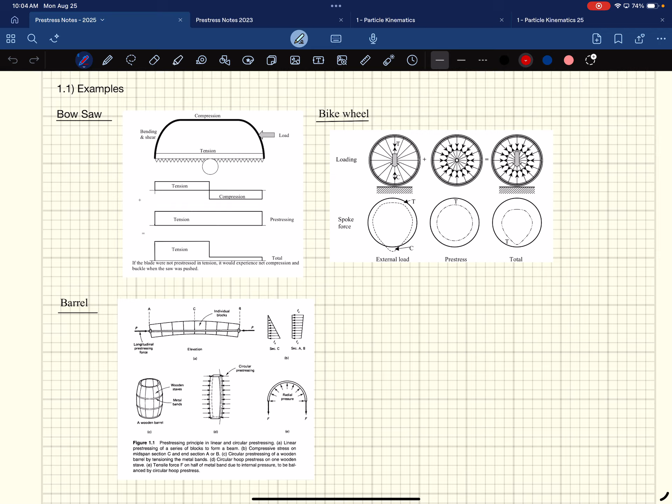Okay. So we talked briefly last time about the history of it, and then this idea of the difference between pre-tensioning and post-tensioning, right? With pre-tensioning, you stretch the steel first, you cast concrete around it, then you cut it afterwards and transfer the load in. Post-tensioning, you cast your concrete with a duct in it, and then you have cables that have plastic sheathing so it doesn't bond to the concrete, and then you pull it afterwards, and then you transfer the load, and you have these anchor points, right? And we briefly talked about that.

Okay, and then we actually talked a little bit about a couple of pages from now. We talked about the steel properties and things like that. So let's dive into advantages and disadvantages. Somewhere here, I got my notes.

Oh, it's hot in here. Oh my God, it's so hot, but I can't open that door or that window. Class outside. Yeah.

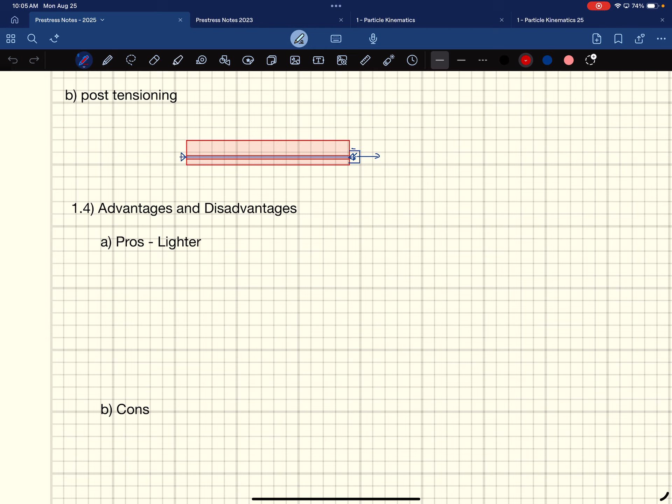All right, pros. All right, it's lighter. Obviously, I got one written in there already. Lighter, right? You get thinner elements, right? Lighter and thinner. You can get away with that. Improved deflections. Right, that pre-stressing helps us with our deflections. We'll talk about that later on in the semester. And obviously, I mentioned this last time.

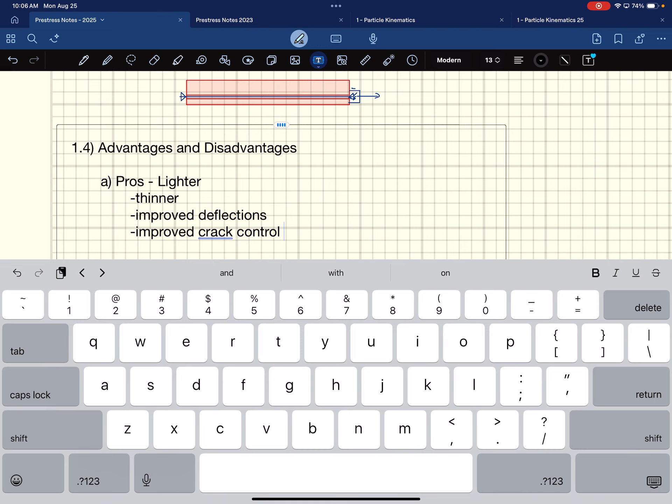One of the main things is improved crack control. Right, which is usually just like an aesthetics thing, right? Looks better. But there are some practical reasons. And nobody wants to go to a building with a bunch of cracks, right? Oh, sorry, it looks better, right? Without cracks. Just mention that, right? One of the reasons, right? It makes you feel uncomfortable.

Hate typing with this. Fuck. Motherfucker. Uncomfortable. There we go.

Right? You ever been in a building where you see a bunch of cracks and stuff? The basement of this one? Yeah, the basement of this. Makes me feel uncomfortable. It could be structurally fine, but still just no thank you, right? Freeze, right?

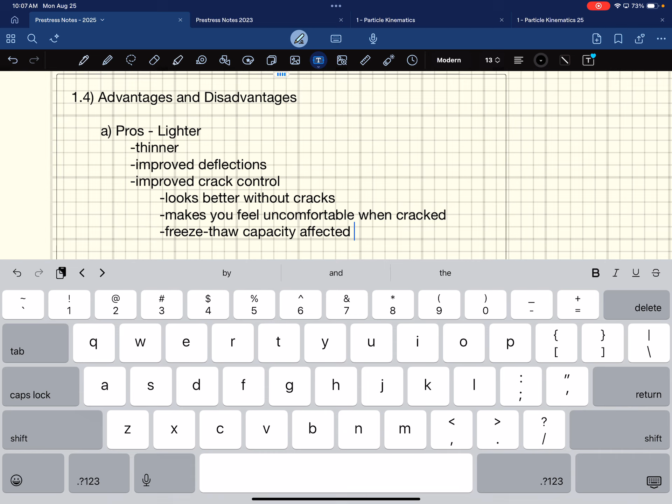If there's avenues for water to get in, the freeze-thaw resistance can go down. Water gets in and expands, it contracts and stuff like that. Corrosion can get in there. That is an issue.

Okay. Another pro here beyond improved crack control: we do get improved shear capacity. Right. Loss of shear capacity is associated with tension, right? You get those tension cracks at 45 degrees. Well, if you pre-compress everything, it helps with that.

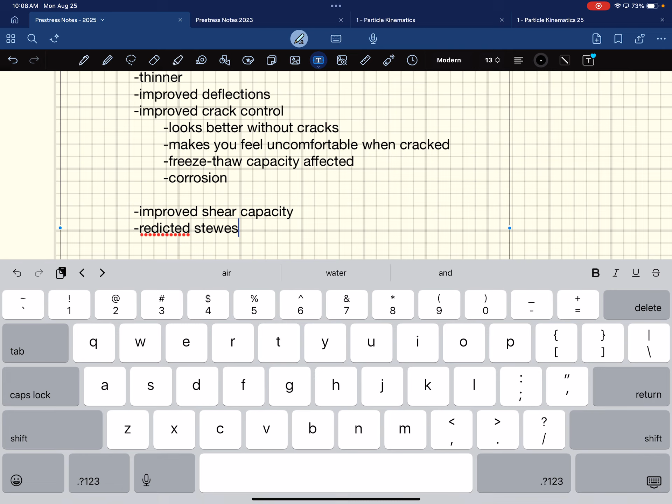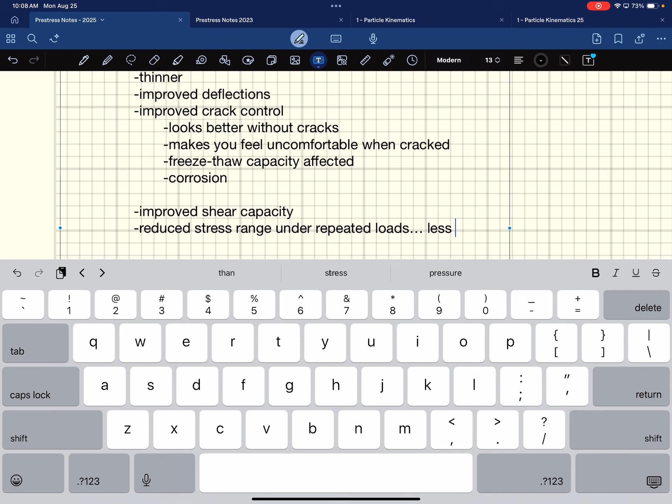Ooh, that's an important one here. Reduced stress range under repeated loads. Okay, where this is an issue is in fatigue. Right? You have less fatigue issues with pre-stressing.

It's the range in which you stress something that is affected by fatigue. If you're going from 0 to the max, it'll have less cycles that you can go through before it fatigues. But if you're just going through a smaller range, you can do more cycles before it fails. All right, those are all my pros that I have.

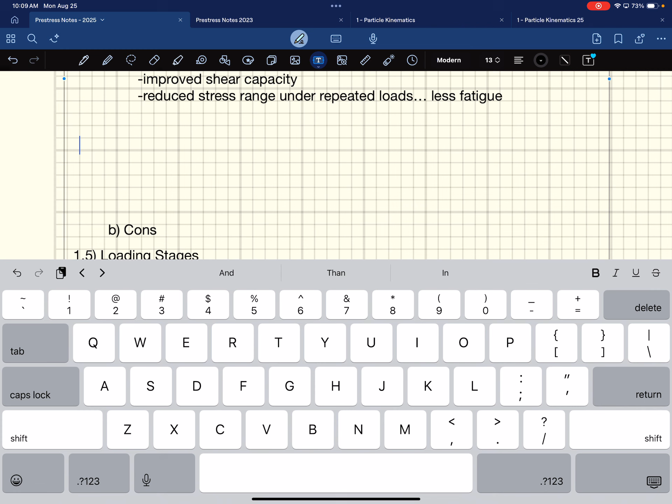Cons, it got moved way down here. Where are my cons? How many cons though? Oh, I see what I did. It's because it kept just going down.

Right. Major con is cost. More upfront costs. Maybe in the lifespan it's not, right? Because you have less maintenance costs, but at least initially upfront, it's going to cost you more to do that.

The other problem, this actually is a big deal around Montana, is contractor and design experience. We don't have a lot of contractors in Montana that can do post-tension floor construction. Right? It's a very specialty thing, and so a lot of times a contractor has to bring in somebody else from the outside, and even the design side of things is kind of new to our people too. Our people are us, Montana.

I mean, it is, right? It is like in your job office. This is a new thing, and some of your senior personnel may have never done a post-tension floor design on anything, and so where are you going to learn that from, right? And so that is a big deal. You might be able to bring something to the table being able to do this when we're done.

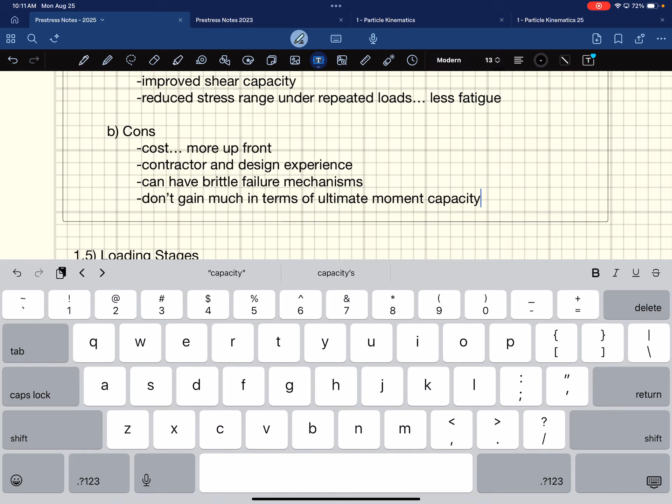And then the other problem is you don't gain much in terms of ultimate moment capacity. Uh-oh. You'd think you would, right? Because you're pre-compressing everything, but you don't. You actually, what is going on? Yeah, you actually don't have much, and we'll get into that way later in the semester.

We'll calculate the moment capacity, but the moment capacity of a pre-tensioned member and a non-pre-tensioned member are very similar to each other, right? And so you don't get much in terms of your ultimate load carrying capacity. Again, this is just a serviceability thing for the most part.

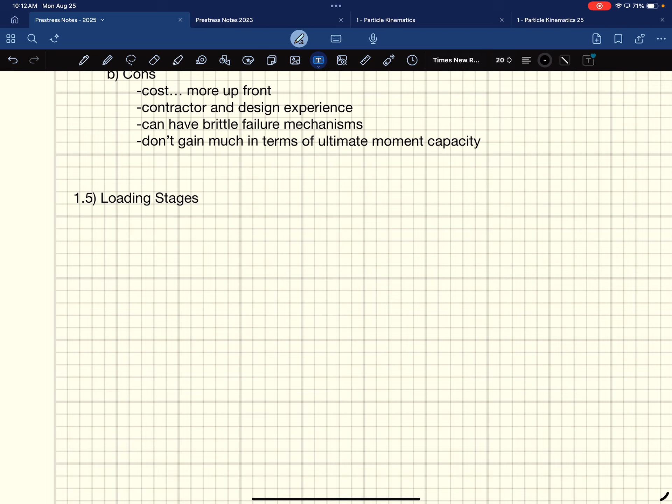Okay, all right, loading stages. We briefly discussed last time what the equation was, right? It's just F over A plus My over I, right? That's all the equation is. The actual mechanics are super simple, and we should get to those by the end of today. But what it gets complicated with is all these different loading stages.

Okay, I used to talk a lot about it. I'm not gonna do that. I'm gonna say simple calcs are complicated by loading stages and varying material strength.

What up, Neil? Coming right from a workout into a nice hot room to sit in. Just a shower for you guys. Oh, you did? Hey, thanks. Very hot in here.

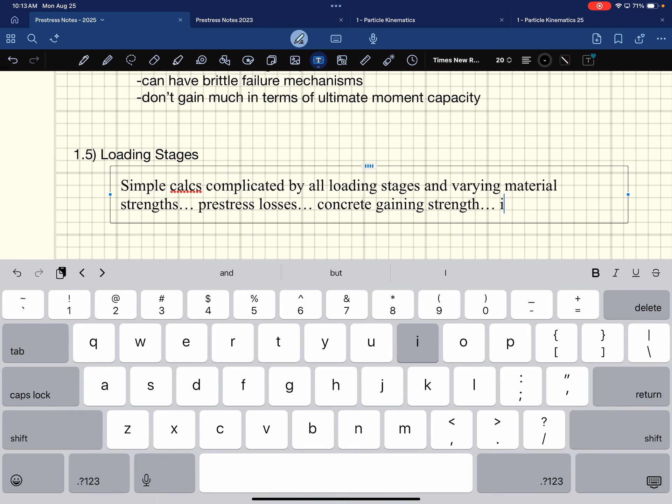Right, varying material strengths, right? We have pre-stress losses. Concrete gaining strength. Initial loading. Service loading. Ultimate loads. Right. Just my thoughts on it, okay?

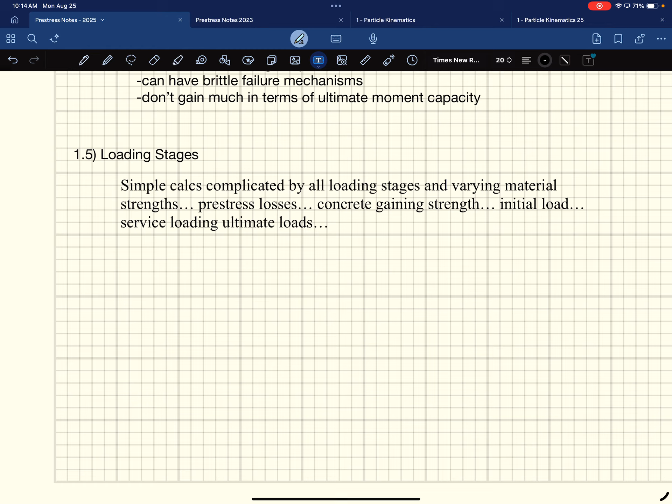We're gonna define these in more detail later on, right? Exactly what loading stages we're talking about and what material strengths you use and stuff like that. But just to set the stage, the simple calcs are complicated by all the loading stages and varying material strengths. We have pre-stress losses, concrete gaining strength, initial loads, service loading and ultimate loads. Right? Everything's just changing.

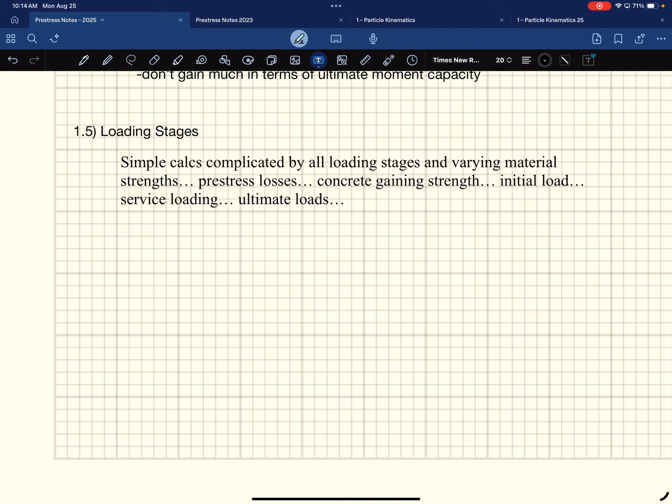Okay, so now we'll do, everybody get that? Get that? Kyle, get going, go. You got it? Got it?

Got it? Everybody get it? You get it? You get it? All right. All right, let's go down to the materials.

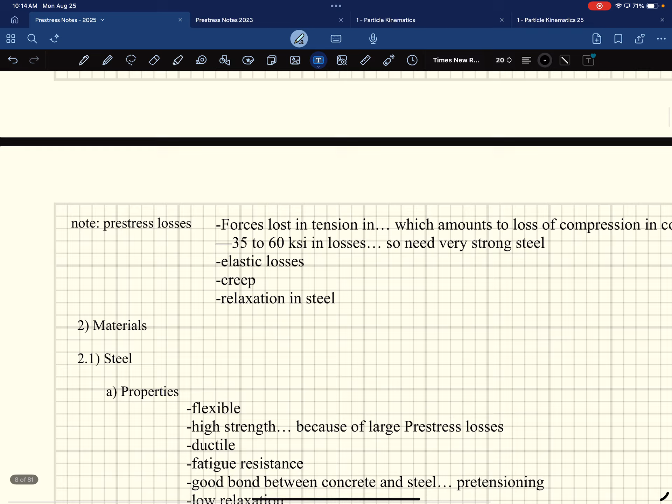Right, you've got to define a few things before we dive into the actual calculations. We kind of set the stage for it, right? So again, we talked about the forces and the tension, which amount to loss of compression in the concrete, 35 to 60 KSI. So we lose a lot of stress due to pre-stress losses, right? And they come from elastic losses. We've got creep that can happen. We have relaxation in the steel, and because of those things, we lose some of our pre-stressing, right?

Regular steel, right, goes up to 50. We talked about the 50, 60 KSI. 36 is your basic, right? We can't be losing that much, right? It wouldn't help us at all, right? Why do that? So then our steel, right?

We want very flexible steel, so a change in length causes less of a change in strength, right, or stress, right? And so we want flexible steel, we want high strength, we want it ductile, we want it fatigue resistant, we want good bond between the concrete and steel, especially in terms of pre-tensioning, right? Post-tensioning, we don't want that bond, but pre-tensioning, we do want that bond, and we want low relaxation, okay?

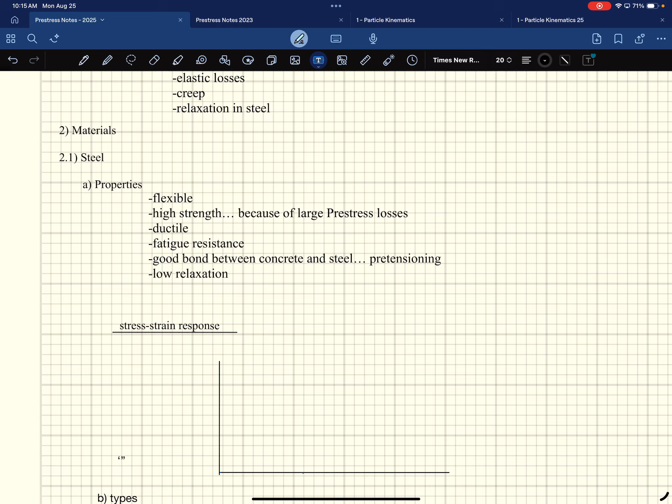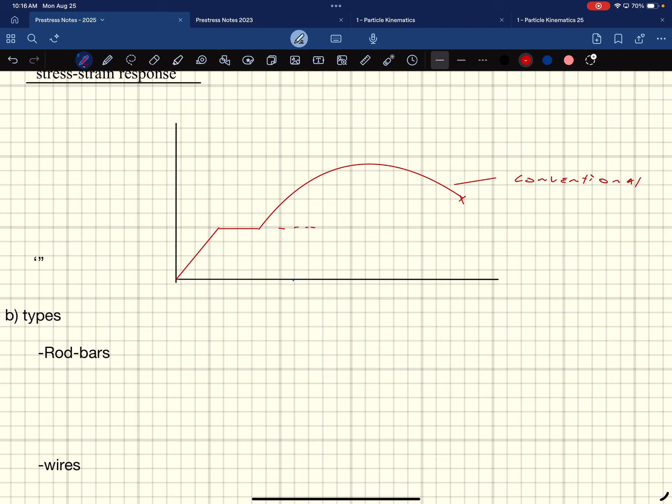So what the actual stress-strain response is, it's worth visiting a little bit on the material side of things. Regular steel will do this, right? It'll go up, hit a nice yield plateau, go across for a little bit, and then it goes through strain hardening, right? And then it breaks over here someplace, right? That's conventional steel. Right? And then this, right? 36 to 60 KSI, somewhere in there. That's where you hit that initial yield plateau.

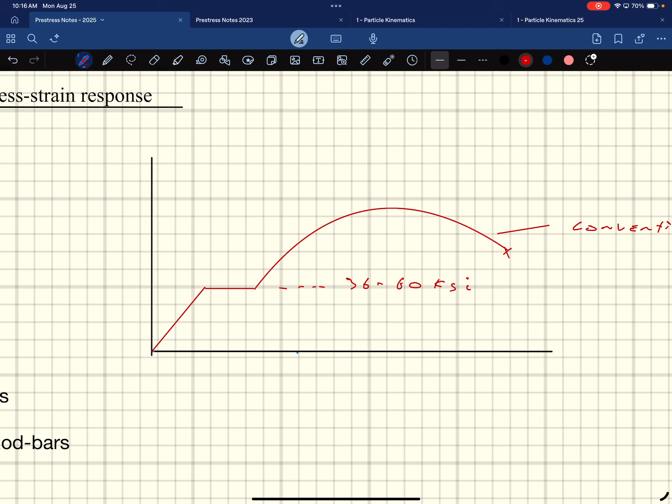When you talk about the yield strength of steel, that's what we're talking about. This initial yielding, right? But really there is a strain hardening that happens afterwards that goes up to about 1.5 times what yield is. But we pretend that doesn't exist in regular design, right? We don't actually take it into consideration; it's kind of built into the conservatism in design.

All right, but what pre-stressing tendons look like when you pull them is they are a little bit more flexible, just a little bit. So they're going to be a little bit less like that. And then they just kind of go up like this, and then they break up here someplace. Actually, that's not to scale. Should I make it even more? It's really high, right? We're looking at around 250 to 270 KSI up here.

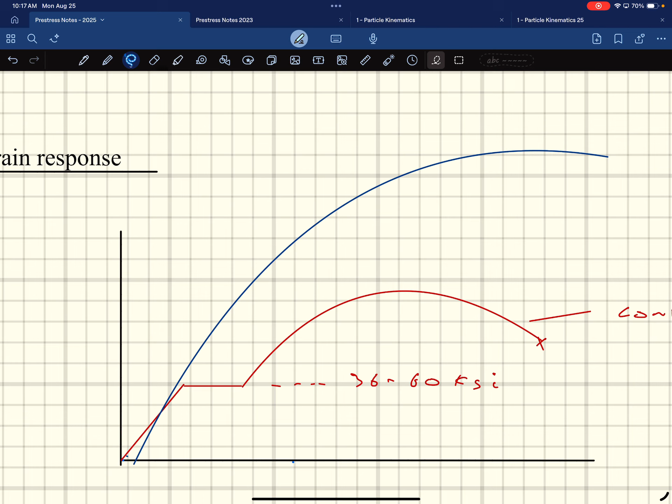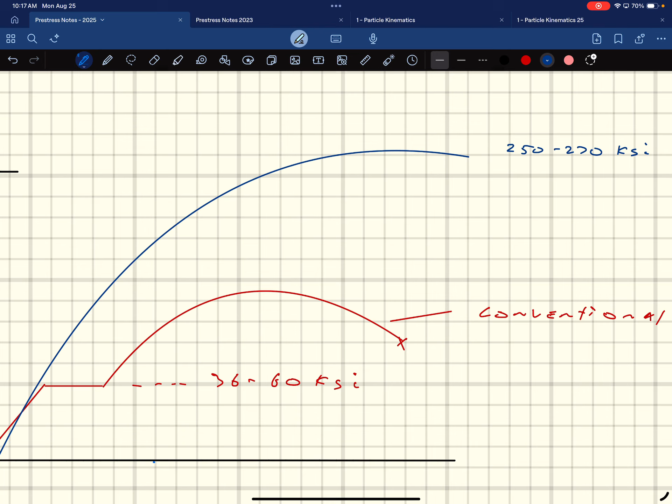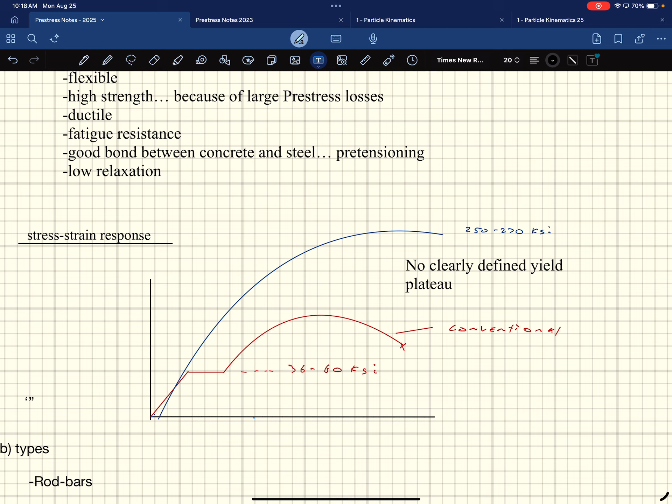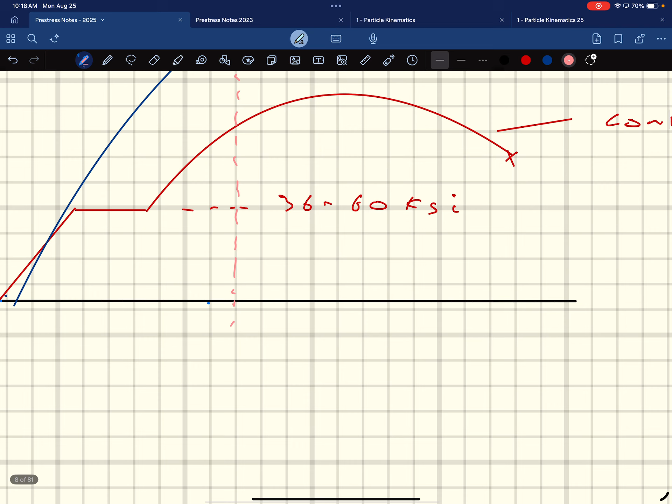But there is no clearly defined yield plateau. It goes all the way up to there. Okay. That being said, they still define a kind of yielding. They do put a spot in here where they call it FPY, even though it's not real. We'll call that FPY, right? And it's at a 1% offset. You look at a 1% strain and they go over and they call that the yield stress. It's not real though. It doesn't have a real plateau.

You may remember doing this in mechanics of materials where you did a 1% offset: you see the slope at the beginning and then you go off 1% and you see where it crosses. Do you remember doing this at all? In the materials class.

You remember it, Neil? Yeah. Okay. Yeah, something like that. Are you lying?

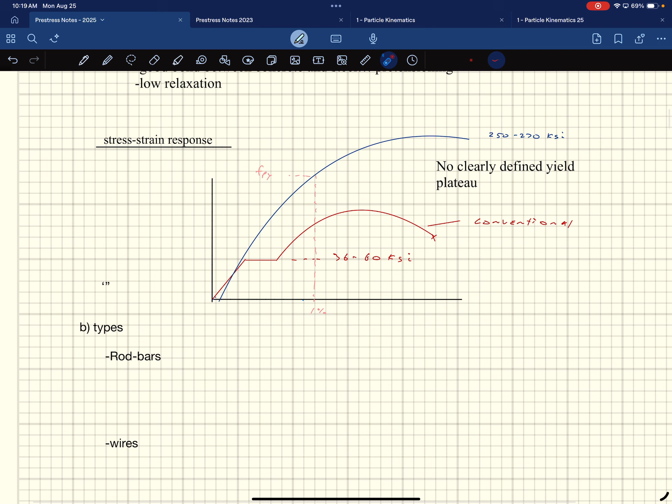It doesn't matter. We don't really need it in this class, but I just wanted to point it out, to tie it into some old stuff. Okay, so that's ultimate, right? So what we trade, and this happens a lot in design, is ductility for strength, right? It's the same basic materials, but we'll talk about the process of how they get it up to 270 KSI. When they do that processing, you lose ductility, right? You do get a little bit of softening before it fails, but obviously not like it does down here.

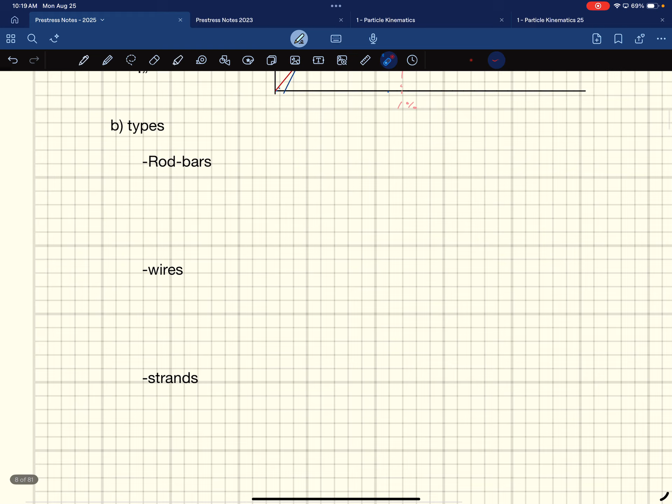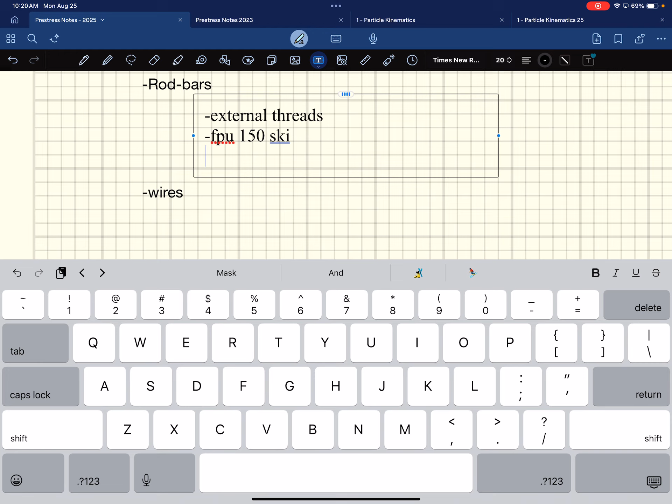All right, so the different types of pre-stressing reinforcing you're going to see. There's rods and bars. These have external threads. And these have an FPU, the U being ultimate, of around 150 KSI. Our EP, or elastic modulus, is equal to about 30,000 KSI.

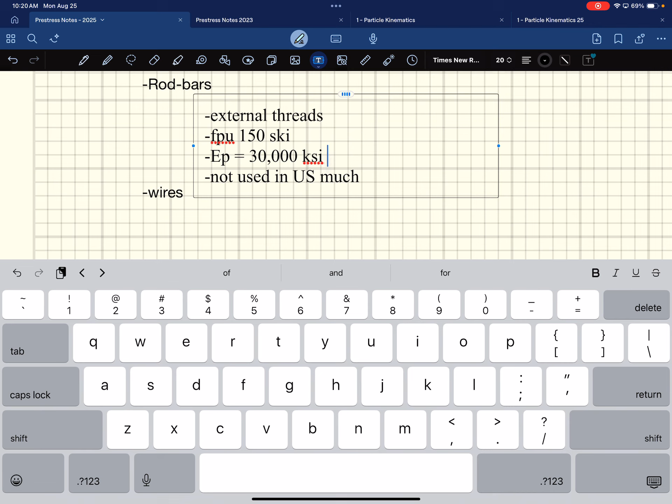Right? And they're not used in the US much. These are rods and bars. We actually have these in our lab downstairs. So we use them sometimes when we test structural elements. The floor in the structures lab downstairs has all those holes that are around to anchor stuff to the floor. The way we anchor stuff to the floor is by post-tensioning items to the floor. So we've got like a hollow core jack down there.

So you go, the pile cap. Was anybody around for the pile cap? Were you around for the pile cap, Kira? Cash, for his research, did a bunch of testing of these big pile caps. Anybody around for that? Look, you guys are. You kind of remember, Tony?

We had these pile caps that we anchored to the ground and pushed and pulled. But in order to make that work, we put a post-tensioning rod, we go up underneath the floor and put a nut on the underneath side. And you go up on the top of it, and we have this hollow core jack that we would then put a nut, and we put the... if there's only some way I could draw it, right? So the floor is doing this, right?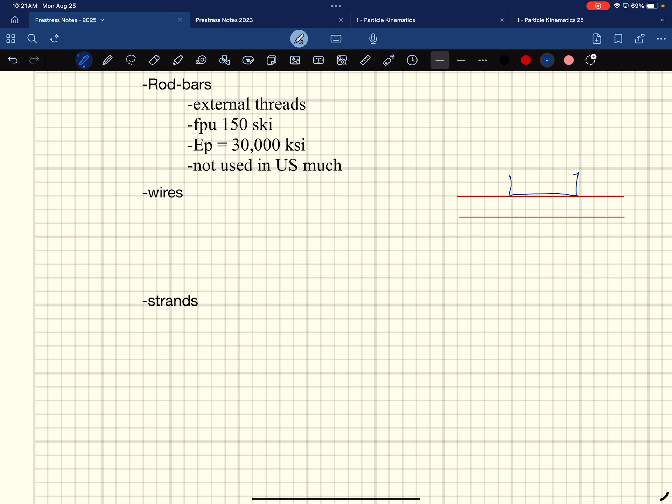Again, I guess this is tying it to our research. So then you'd have like this. Here's our pile cap that we tested. Looked like this, right? And we needed it anchored to the floor. And so there's little ducts that would go through like this, and then we would have the post-tensioning rod that's in pink here go through. And we put a nut on it down here, and then we do our hollow core jack. There's a little bridge. And then our jack would be right here.

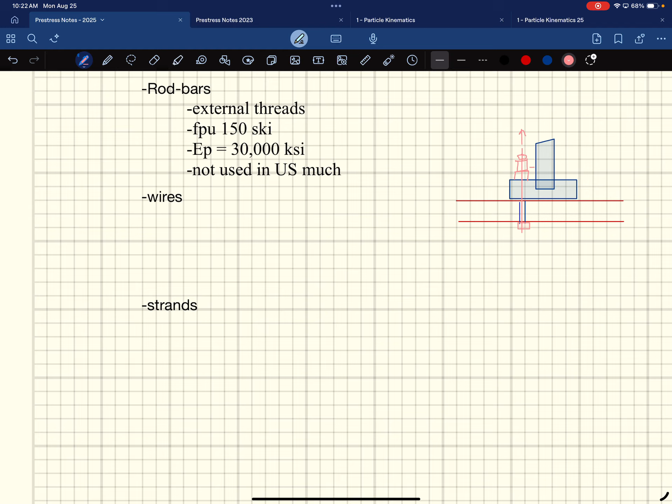And then we would use that jack and we would pull on that post-tensioning rod. Okay? And how we would pull on it, there's a nut right there. And then we would use this jack. We would actually push against that nut, which would lengthen this thing out, right? This thing would get all stretched out.

And then underneath it, we would take another nut. Once we pulled it out, we would put a nut right here and tighten that nut against the top of the concrete, and then we would release the load. And so then that nut would have this massive force that's pushing down on this thing to hold it in place. So anyways, that's one place that we used it. If you want, you can go down in the lab and you can actually see a post-tensioning rod down in the lab. They're pretty cool.

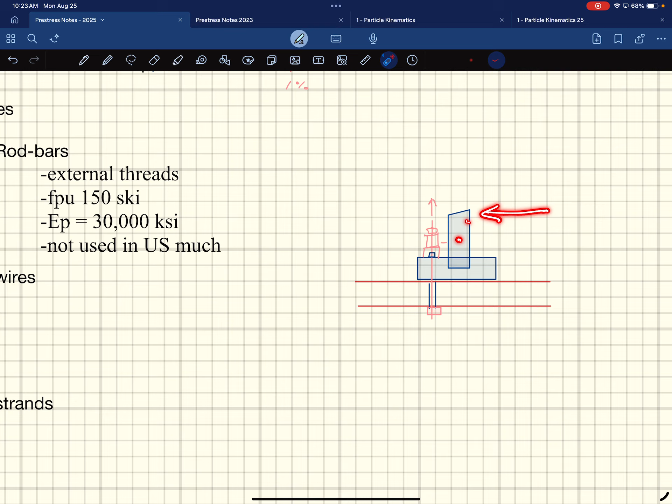It works really well. Because in what we were doing in these tests, we had this big load frame and we were pushing and pulling up here on the top. So there's a big load frame over here, and we were pushing and pulling on the top of that thing. And if we didn't post-tension it to the ground, this thing would be wiggling all over the place, right? And we wanted it to not move. And the only way to get it to not move is to cause a big post-tensioning force to hold it down in place. Anyways, that's the rods. We have them in our lab downstairs.

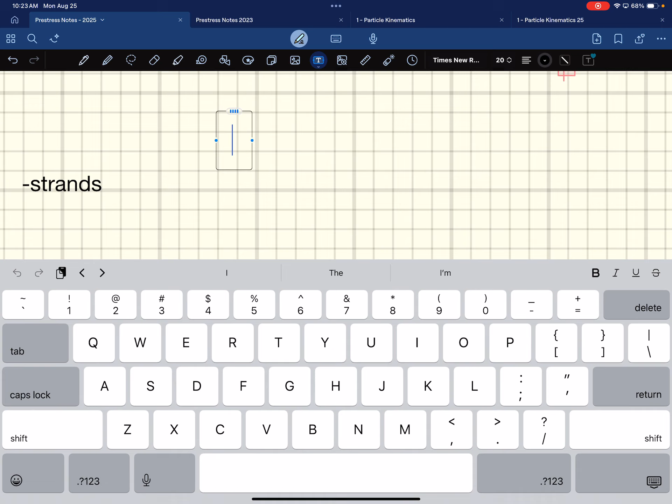There's also these wires. The wires don't really get used much. They're smooth wires. Smooth. Not used on their own anymore. They used to be used on their own sometimes, but they don't really get used on their own anymore. Where they do get used are within a strand.

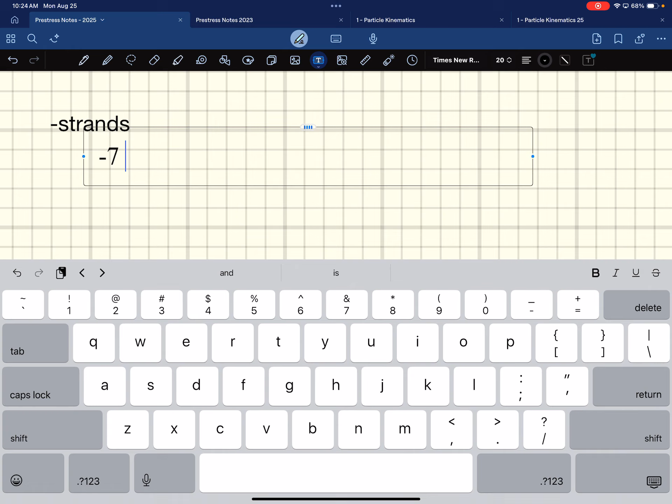Right. These are 7-wire strands, twisted together like a rope. I forgot to bring it today, but I have one in my office. I'll bring one in so you can see it. We'll look at a picture of one here in a second.

Ep in this case is, we said we wanted flexible. Well, this is all we can get: 28,500 ksi. Right. So slightly more flexible, but not a lot. All right, the fpu in these guys is around 250 to 270.

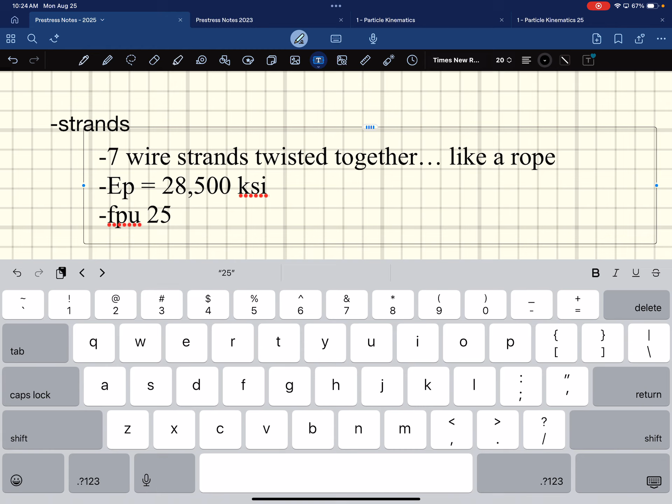Right. Used exclusively. Now, and then we're going to say see table for dimensions.

Okay, so 7-wire strands twisted together. They are a little bit flexible, and the reason they end up being a little bit more flexible is because they are twisted into like a rope, right? And when we pull on it, there's a little bit of twisting and untwisting that happens. So as a unit, it ends up being slightly more flexible than conventional steel, right? Again, this is where we're getting the 250 to 270.

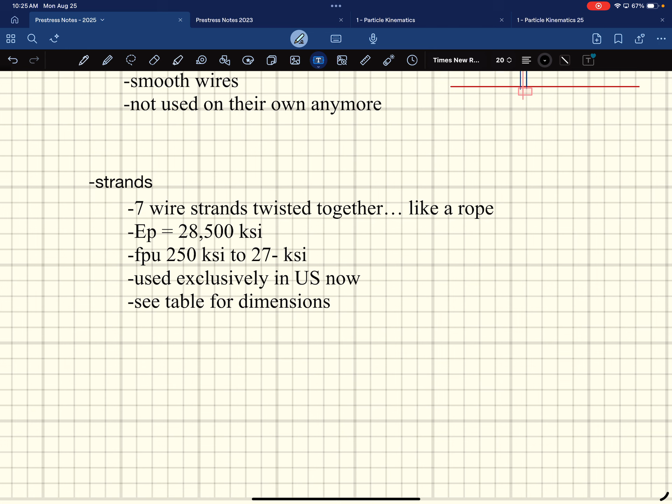How do these strands compare to the ones they use on suspension bridges? Like the cables on the Golden Gate Bridge. Yeah, I have no idea. I would assume that's conventional steel that has like very ductile response and stuff like that. Yep. I'll ask ChatGPT later.

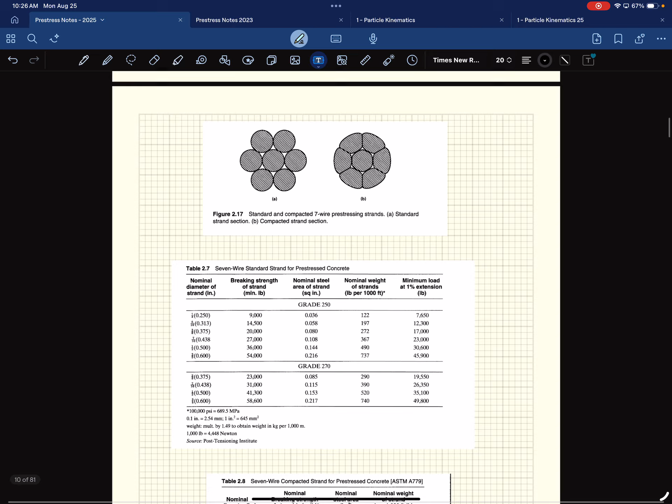Okay. And the reason I say see table for dimensions is, this is what they look like, right? They're strands like this. And this is a cross section: 7-wire strand, 1, 2, 3, 4, 5, 6, 7, right? I think that one's got a name. It's like the king strand. It just goes straight down the middle. If you're a pre-stressing guy, you really throw these terms around. So if you're ever talking about a king strand, it's the one in the middle, and all these guys are surrounding it. So that's what a 7-wire strand looks like.

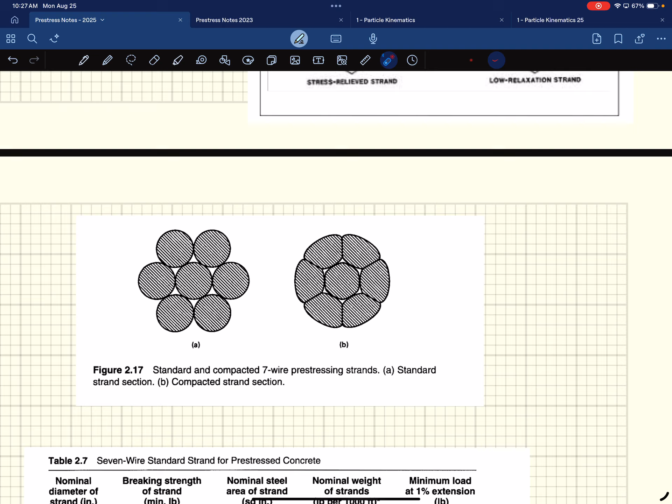If I'm trying to figure out my effective area for calculating the pre-stressing force, when they define these things, they talk about the diameter. Well, you can't just take that diameter squared over 4 times pi and tell me the area, because there's all these little holes in there. You couldn't do that in regular steel either, right? If it's number 8, you can't just say number 8 divided by 8, because things get weird, because it's the United States, we do imperial units, and things don't make sense. And so this is one of those cases.

So when we're looking for the area of steel later on, you're going to have to use this. If I have a 1/2 inch diameter strand and I need my nominal area of steel for design, I have to look it up in this table. So a 1/2 inch strand has an effective cross-sectional area of 0.144 inches squared, which is not 0.5 times 0.5 times pi divided by 4. So just keep that in mind. Somebody does the homework and they're slightly off from everybody else, and it's because that's what they did for the area of steel. You've got to pull it out of this table. Okay.

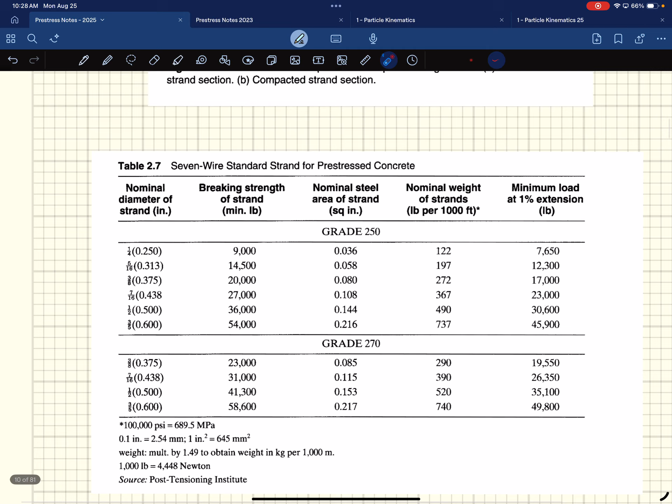Yep. And there is also a difference between standard strand and compacted strand. I don't think this gets used very much, but you can order it compacted, where they send it through another process where they squish it down to make it a little bit tighter. Usually it's just going to be a typical strand like this.

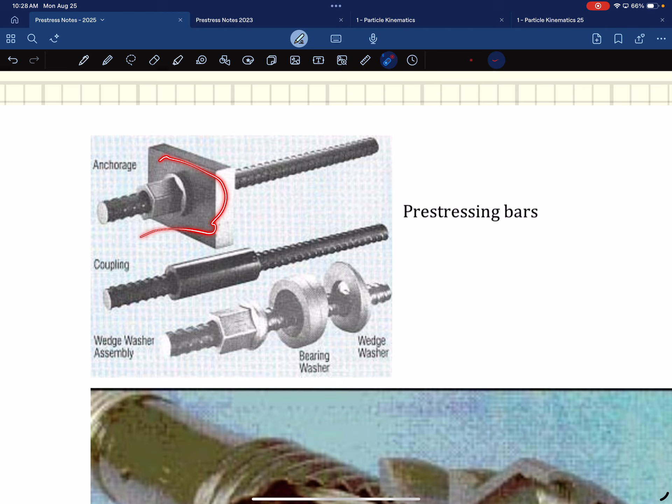Here's the rods or bars. They look like big pieces of rebar, but instead of having deformations like lugs for bonding, they're actually threaded, so that you can thread this component on. This is a big bearing plate that you would use. They have couplers for them and stuff like that. That's the pre-stressing bars or rods.

Sometimes they really bundle these, right? So this is more of a post-tensioning application. They have a bunch of 1/2 inch diameter strands into one anchor. So this is a big anchor point, and there's a bunch of different strands in here, which are made up of a bunch of different wires.

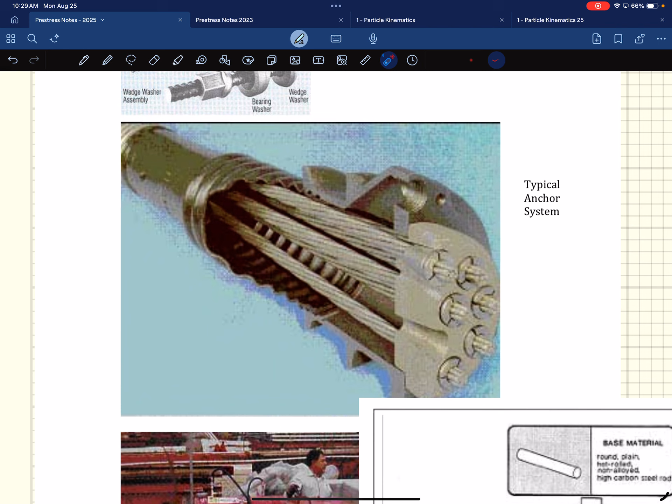So if you're doing post-tensioning design, you can imagine, because remember with post-tensioning, the way that the pre-stressing gets added to the concrete is two big point loads on the end, right? So that's what's happening right here. Think of the point load that this is going to cause. Each one of these things is carrying 270 KSI, and then you have however many there are going around. Think about the massive millions and millions of pounds of force that are coming in at the end of your specimen. So part of the post-tensioning design is designing that anchor point location. That's going to be lots of steel included where that post-tensioning comes in.

Here's a big post-tensioning jack. This is for pulling a bunch of these at the same time. That's what this jack is about. This is where I wouldn't stand anywhere near. I wouldn't want to be this guy right here, because you got millions of pounds. Look at the size of that jack that's pulling on this thing. It's pulling this way, and there's a big anchor point right there.

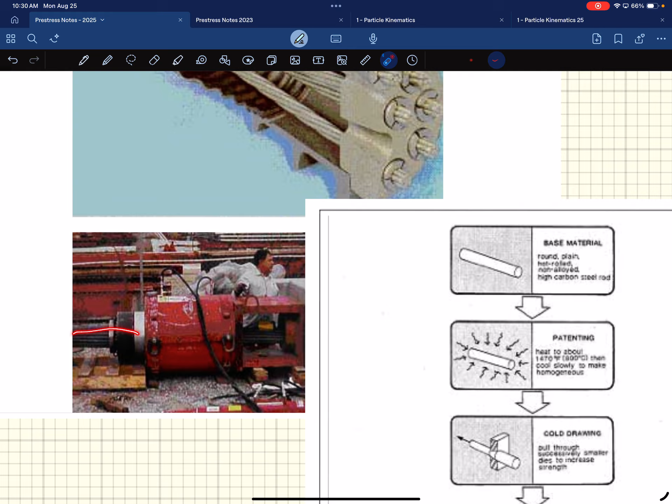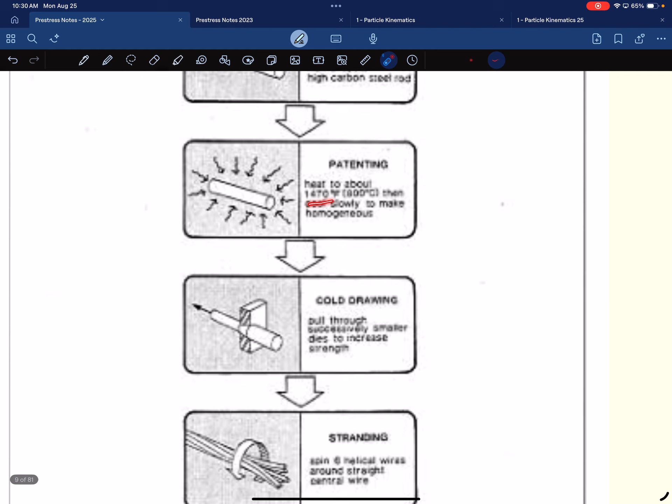This is a really clear description of how they get up to 270 KSI. Years of copies has led to this. So you start out with the base material. This is how they get up to 270. Then they heat it to 1470 degrees Fahrenheit. Then they cold draw it, so they pull it through a small little die here. They pull it through, and then they lengthen it like that, and then they do strands. And then afterwards, once they put it together and twist it up into a strand,

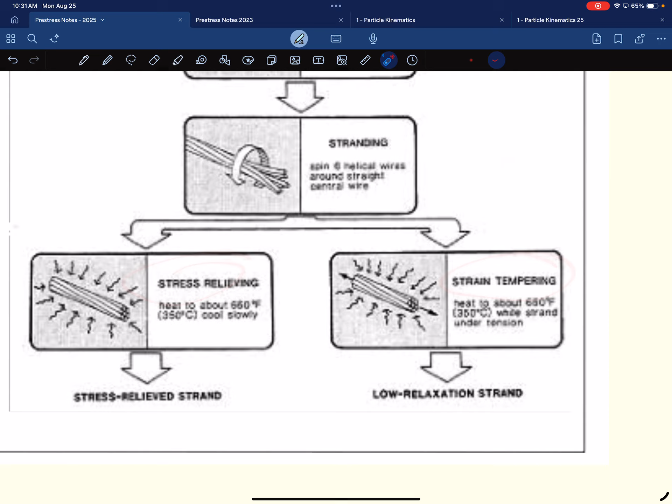they could do stress relieving. And stress relieving, we'll talk about this later, reduces the amount of relaxation you get in your steel. And so they'll define those things, something you order, and that has to do with your pre-stress losses calculation. Sometimes you'll have stress relieving, and then strain tempering is where they heat it again and then release it. Obviously these will cost more. But just to show you that it is standard steel, but they have to go through a big process to get that up. And by doing that process, they lose ductility. That's why we don't have a very ductile response.

Okay, 7 wire strands, got the materials down. Like I said, I meant to bring that, I forgot it. I'll bring it in next time. I basically have an anchor point and a pre-stressing strand in my office. Now in the lab, I got the rods. Okay, so what properties do we want of our concrete?

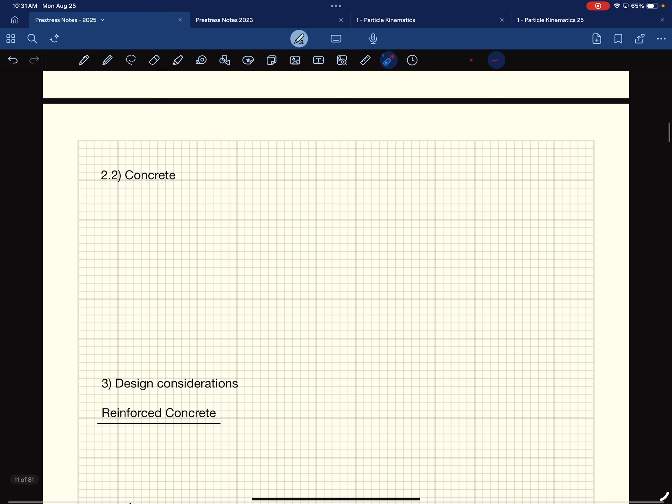Oh, I'm sweating. You guys don't mind if I lecture with my shirt off, do you? Is that okay with you guys? Is that fine? Yeah, walk around. I was like, sure, how's it going? It might get an HR call. The new president walks in and I'm standing with my shirt off. You don't understand, it's really hot. I'm a sweater and it's really hot. All right, our concrete. All right, we went hot. Oh, how'd that get so small?

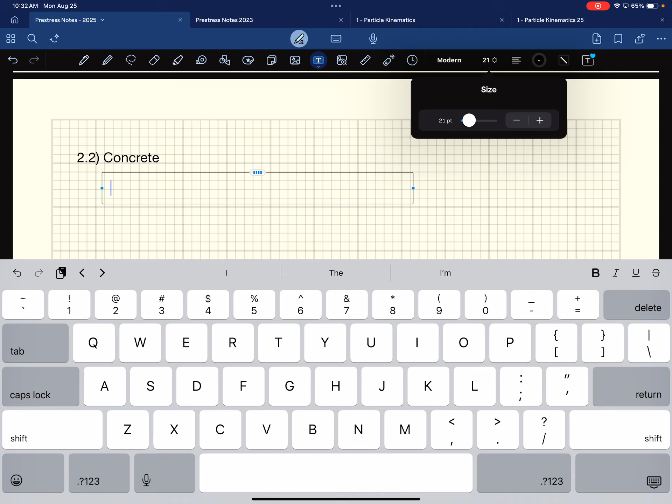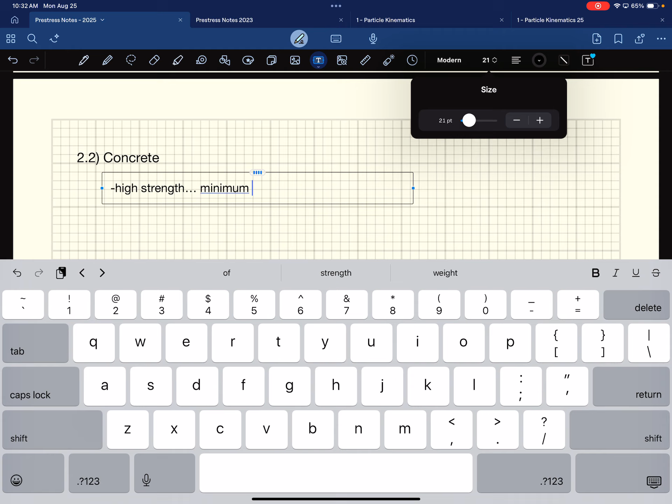All right. High strength. Same idea. In fact, there's a minimum concrete strength of 6 KSI that you have to use, and that's actually dictated by ACI. But it's typically around 10 to 12 KSI, because we want to put as much pre-stressing force in there as we can. And obviously the strength of our concrete is going to dictate some of that. We can't be stressing it more than 6 KSI. We want to get more and more in there. So usually it's 10 to 12 KSI. Especially nowadays, it's pretty easy to get 10 to 12 KSI.

Tied to that, we want high early strength, because we want to be able to transfer the load from the steel to the concrete as soon as possible. Imagine a pre-stressing plant: you have to stress that steel first and then you cast concrete around it. Well, now you're taking up an actual bed at your plant. You're getting paid to make these things.

And so you cast concrete around it, and I cannot cut the steel and transfer it into the concrete until the concrete's come to strength, right? And so you want something that gets high early strength, because if I get my high early strength, then I can come cut it, it'll transfer the load, then I can move it out of the way and put another one in there and make my next one, right? Or even on a job site when they're doing post-tensioning, you cast your concrete floor, and then you want to post-tension it afterwards.

I just realized you have a sweatshirt on, Sean. How are you doing that, right?

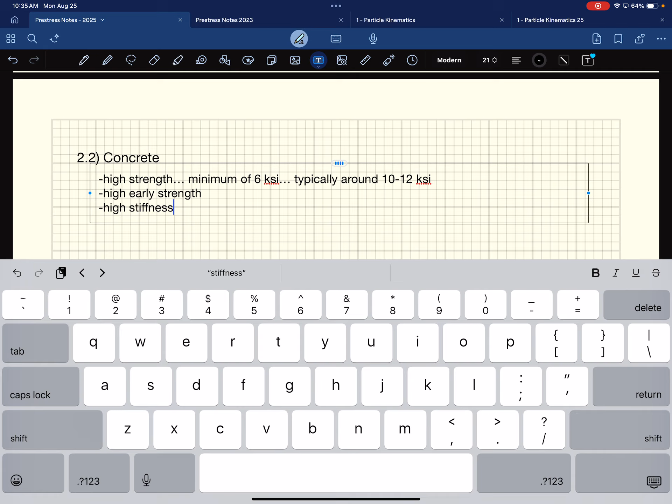Okay, you want high stiffness, and we don't want it to deflect much. If it deflects a little bit, you get more pre-stress losses. Right. This is tied to aggregate stiffness. The stiffness of your concrete is tied to aggregate. So if you use stiffer aggregates, you get higher concrete stiffness. Right? We want low creep. This is tied to low water cement ratio, good aggregates, and low paste.

That was a big one, right? We talked about that last time. The paste, it's kind of like a glacial flow. If you have a lot of paste in there, basically the concrete kind of flows. If you have low paste and more aggregates, you get less creep, right?

We want low shrinkage, right? Same way, we're gonna go low paste, low water cement. Shrinkage has to do with the drying out of the concrete. It'll shrink over time, right? And we don't want that. Because again, if my concrete shrinks or creeps, I lose pre-stressing when that happens. Obviously, we want durable. The reason we're doing this is to improve serviceability. Tied to that is durability.

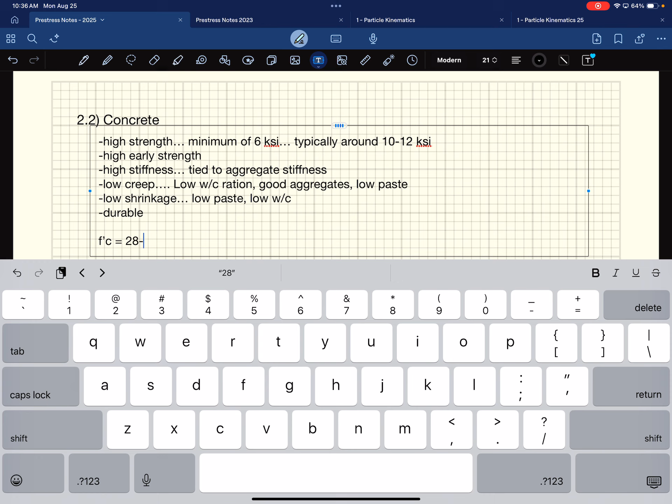And so there's going to be things floating around here. F prime C, we'll define this a little bit later too, but F prime C is what we're used to seeing, right? That's the 28-day strength. But when referring to initial stuff, it's F prime CI. And that refers to early strength. Release. All right, and the I is for initial.

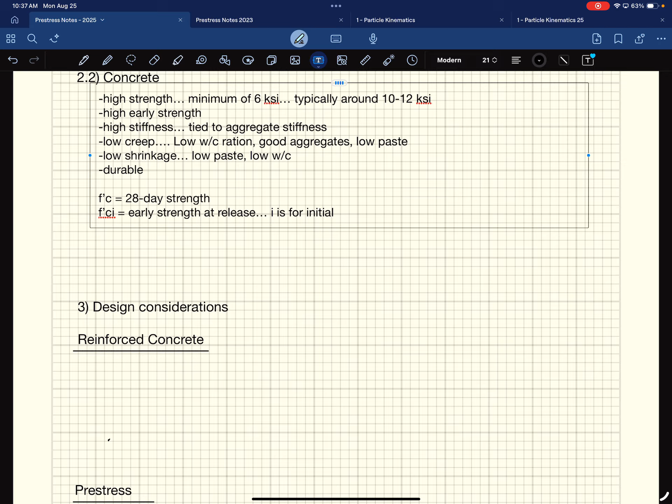But that's why we care about releasing. We need to know what the strength is at release. And that's why a lot of job sites actually have these maturity meters hooked up to their concrete, so they can track what their concrete strength is going to be, and they know when to release things. Okay. There's our materials. Kind of set the stage for them. Basically high strength materials, high strength concrete, high strength steel. And you can't just grab conventional steel, you can't just grab conventional concrete.

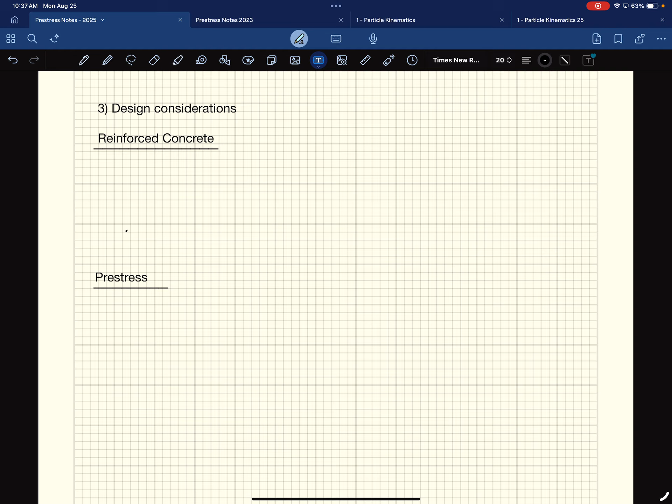Do you use conventional additives in the concrete? Yes. Whatever you could do to make that happen, right? So you go really low water cement ratios and then add in some water reducer to get a little bit more flow out of it and stuff, right? What's really nice is pre-stressing plants, it's a factory, right? So they can be really specific with their concrete mixes, versus post-tensioning, which gets done in the field, and it can be a little bit more complicated.

A perfect example would be our parking garage. They had major issues with our concrete in the parking garage because our parking garage is post-tensioned, and it had to have a certain slump. It had to have corrosion resistance because you have the salts that get moved into it. It has fibers in it, has all sorts of stuff.

Actually, one of the floors in the parking garage did not come to spec in terms of concrete, but everything else had been cast by the time they knew, and so they had to sharpen their pencils and do some calcs afterwards to make it work. You should ask Jay about that. Oh, did you do that? Yeah, they were doing that one. And I know there were some major issues with one of the floors, but they were able to calc it out and it still worked afterwards. But it was a very complicated mix that they had to use.

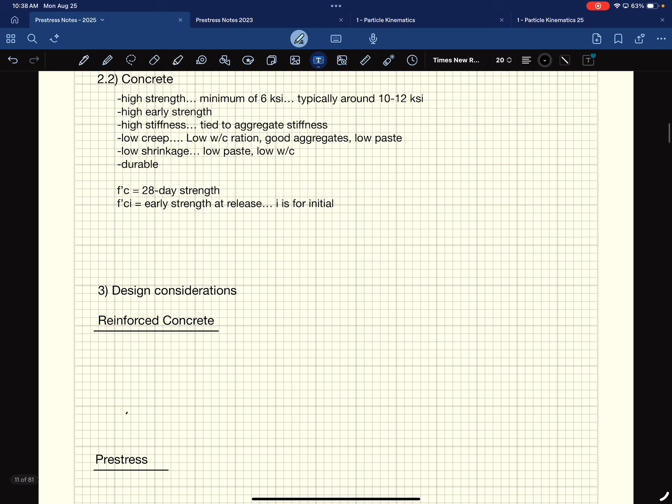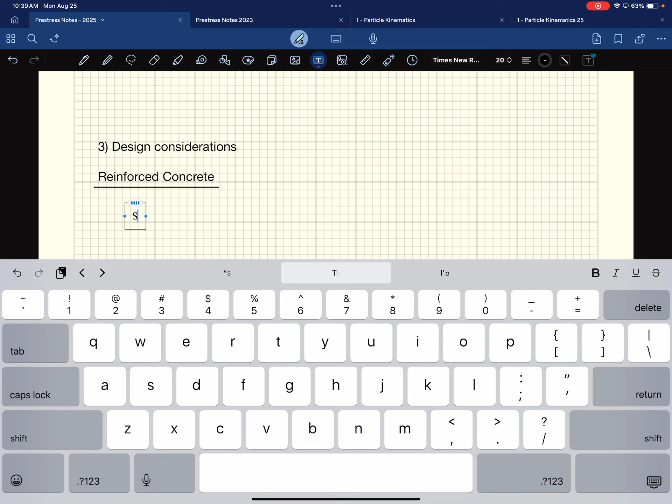All right, so reinforced concrete. This is just to contrast regular reinforced concrete with pre-stressed concrete, right? And I mentioned this before, we start out with strength design. In regular concrete, what you learned back in Structures 2 and probably in Tim's concrete class last semester, you always start with strength. And in fact, most designs start out with the moment capacity.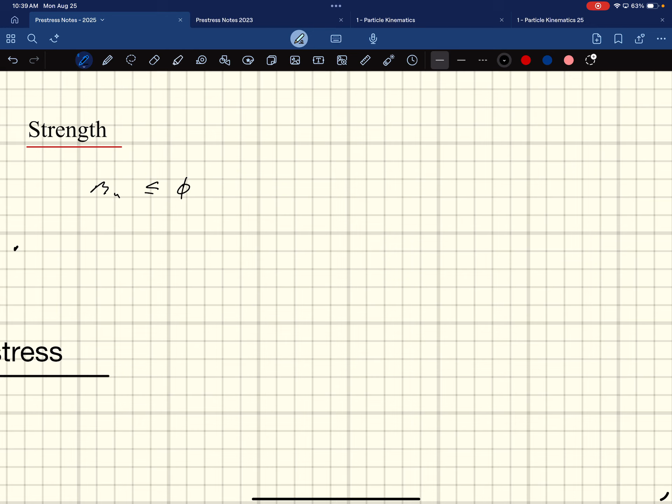We had to make sure that our Mu was less than or equal to our phi Mn. Our demand was less than our capacity. You then checked your shear, had to be less than or equal to your shear capacity, right? And then on the serviceability side,

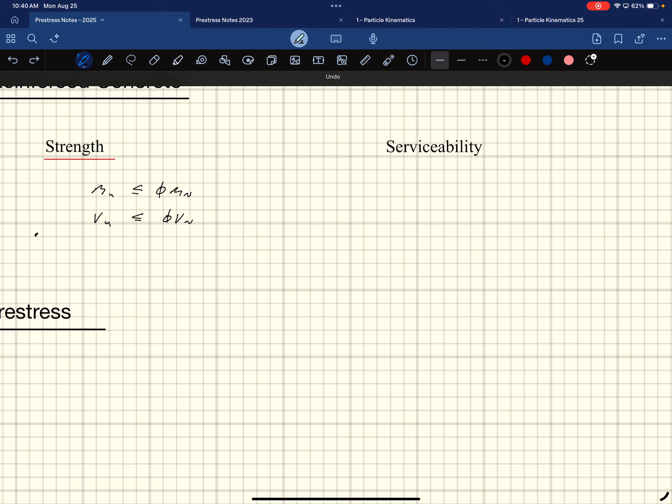All right, serviceability. And there we're talking about deflections. We came back and checked our deflections. After we made sure nobody would die, then we said, okay, does it work? And in regular concrete, this is tied to the H-min. In Structures 2, that's all we did for serviceability checks: is my H greater than H-min? Great, then it works.

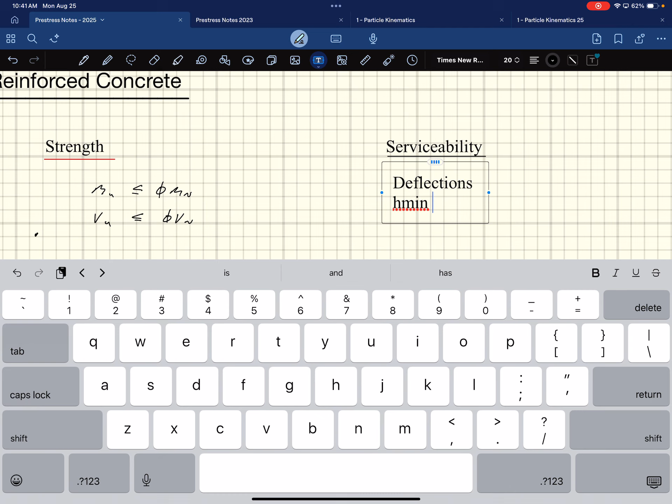Or you can calculate. Probably in Tim's class you calculated deflections, and there was the cracking moment or the cracking modulus, and you took that into consideration. But the whole point there: start with strength, check serviceability. Pre-stressing, that's not the case. We start out with serviceability. That's why we're doing this, for serviceability concerns. And we'll look at it in a little bit, just a little foreshadowing.

What it ultimately boils down to is making sure that our stresses are within a range. The stresses in my concrete, my f's, absolute value because we're going to learn about signs in a little bit, have to be less than or equal to f allowable. This counts for compression and tension, so that's why I put the absolute values on the outside. Compression's going to be negative, tension's going to be positive.

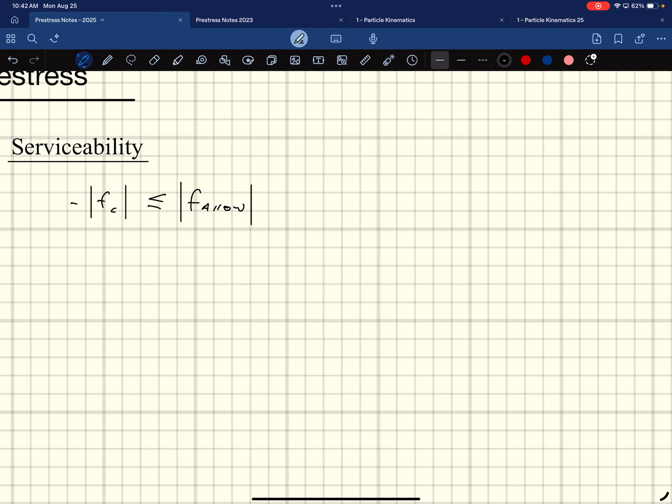We just have to make sure our tension stresses are not bigger than our allowable tension, and our compression stresses are not more than the allowable compression stresses. This is all elastic analysis, back to mechanics of materials. We're worried about cracking, and cracking is tied to this f allowable. There's an allowable amount of tension stress in our concrete. If we get more than the allowable, we're going to get cracking.

And then deflections are something we check first too. We're doing this for serviceability, and our deflections are more complicated than just an H-min. We're actually going to calculate the actual deflections we're going to see in our beam, okay? And then strength is an afterthought.

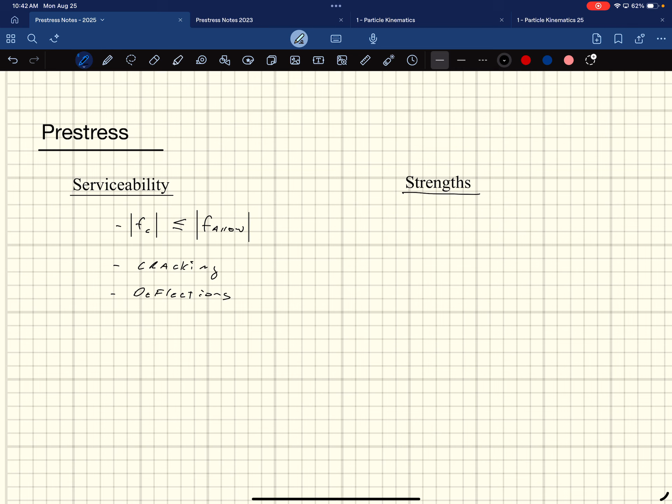Oh, by the way, once I get it working for serviceability, then let's make sure that our strength works. We still do it. We still check the same things. Our Mu has to be less than or equal to phi Mn, and our Vu has to be less than or equal to phi Vn. Right? That still happens. We actually still have to make that happen, but it's after the fact.

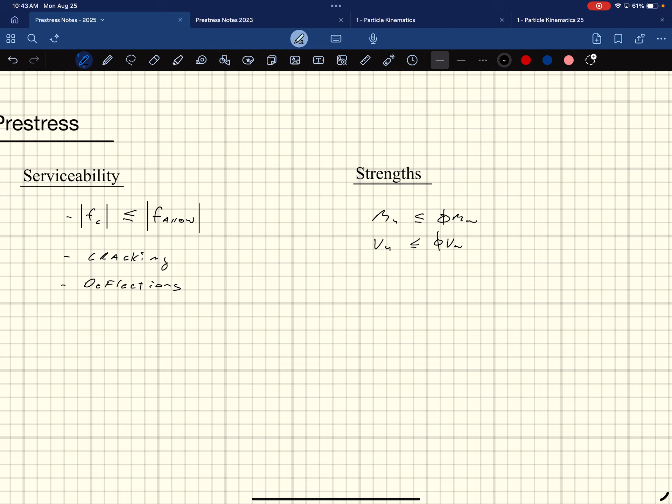It's a secondary check, which always seems so weird to me, because your whole design career has been the other way around, right? People don't die, then we'll check to make sure that it'll work serviceability-wise. Is serviceability going to work? Oh, by the way, are people going to die? Obviously, if you find out people are going to die, then you have to redesign things. You don't get away with it, right?

And the other thing that's floating around too, this is service loads because it's serviceability things. Unfactored loads are happening over here. When you go over here, factor your loads, right? Here people aren't dying. Here people are dying. People are dying, factor loads. People not dying, don't factor your loads. Use what you actually think it's going to be.

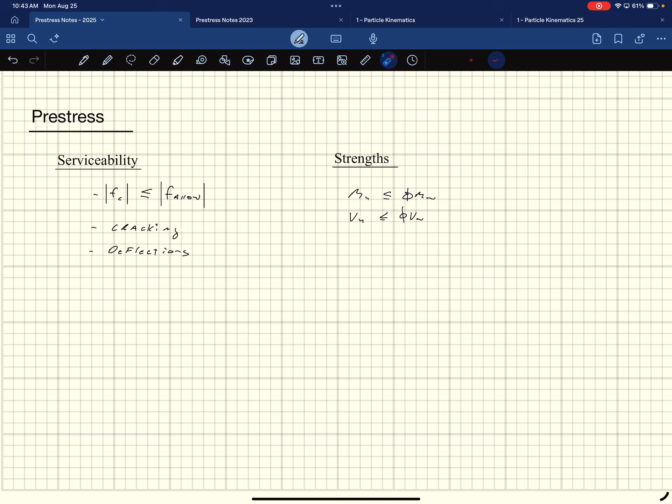Okay. Design philosophies. Okay, here we go. Starting to talk mechanics. These, again, I'm just following Stanton's notes, right? Your first assignment, I'm going to assign a homework here shortly. One of the first things is to read through Stanton's notes, chapters 1, 2, and 3, just so you can familiarize yourself, plus some stuff out of the PCI design manual. But this comes out of his discussion, right?

And we're going to talk about the moment curvature behavior, right? So how does moment relate to curvature? Curvature is similar to a stress strain where you have a stress strain response, right? We plotted before, stress versus strain. Goes up and then it yields. But if we look at a section, what does a section do? Something equivalent to stress strain is a moment curvature. If I start bending a beam, how much it curves relates to how much moment it can carry.

So it's just equivalent. Taking a step up, where stress strain is just pulling on a piece of material or squishing a piece of material, whereas moment curvature is how does the cross section behave when I try to bend it? Okay, the cross section that we're going to discuss here is this guy right here, a beam, right? A regular beam that has a pre-stressing strand that's off center, right?

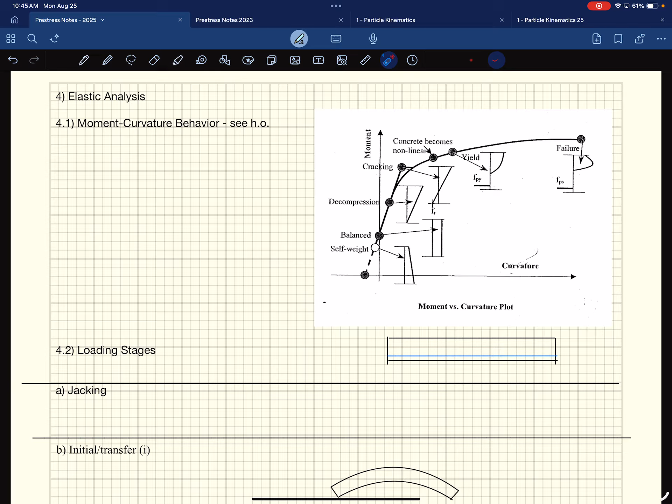Previously, we showed a pre-stressing strand up here in our notes. We showed a pre-stressing strand being centered, right here. Well, that one's not really centered. We showed it centered, right? But that's not the best place for it. The best place is to put it down where the tension's at, which is down at the bottom, right? And so that's what this is talking about. So to get us thinking in the pre-stressing world, here it is. We have our pre-stressing strand off-center down at the bottom.

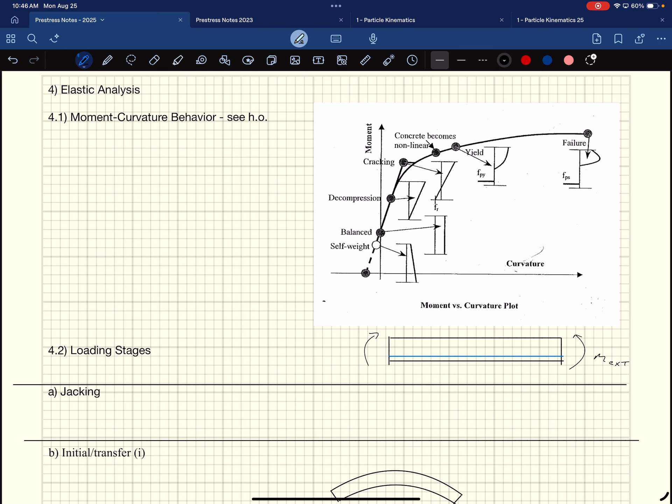And then what we're going to do is we're just going to start increasing the external moment on it. I'm going to start increasing that moment, start bending it. And when I start bending it, its behavior is going to change, right? So starting out right out of the get-go, where I have no moment on it, where I'm not applying any external loads, this thing is actually going to be curved up, right?

So just because this thing is off center, we'll talk about it in a little bit. We'll actually write the equations down. But because that thing's off center, it has like two big point loads coming in right here. So the beam without any load on it is actually going to be curved up. It's going to be bent upwards, okay? And that's why it has a negative curvature over here. That's why it starts off to the left, because it's actually bent up. It's curved up.

But as I start increasing the load on it, my moment, right? This is my moments on this axis and curvatures on this axis. So this is a negative curvature when the moment is equal to 0 because it's bent up. But as I start increasing that moment on it, and say I just have the self weight on it, my stress distribution is going to look like this. I'm going to have a bunch of compression down at the bottom and less compression at the top, but it is still going to be a negative curvature, just under its own self-weight.

It's gonna be bent up a little bit still. That's why we got a little bit of negative curvature under the self-weight. And so that's actually a little foreshadowing. When we look at release, when we talk about, you pre-stressed your steel, and you cast the concrete, and then you release it and you transfer the load into it, what we actually check is to make sure that we

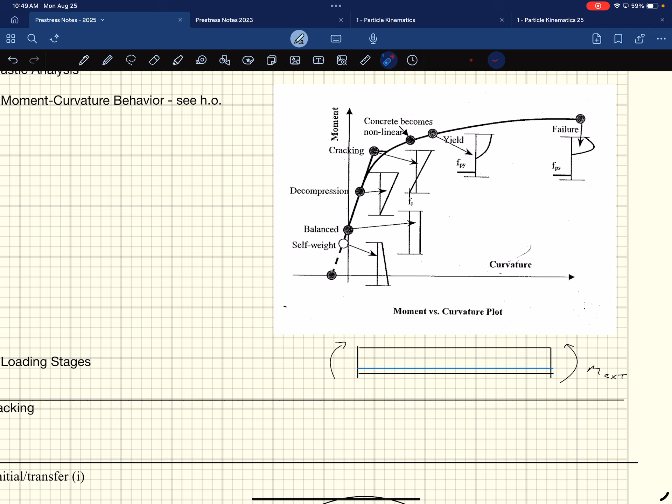But versus out over here, your floor is going to creep down as you go. So a balanced condition is one of the things we aim for in design, because then if it does creep, it just stays flat. All right, and this will happen when your internal moments and your external moments cancel each other out, okay?

And then we get to another point called decompression. That decompression will happen where the extreme bottom fiber will get zero compression. It starts out pre-compressed, but I'll add so much moment on it that I'll get to a point where it starts to become uncompressed, and that's the decompression point.

We keep applying load, we'll start getting tension in the bottom. The external load will be so much that it starts canceling out what the pre-stressing is doing, and then you'll actually get to a point where you can crack it. That'll happen when we hit fr at the bottom, which is the rupture capacity of our concrete. We keep applying load, and it starts looking like what you're used to seeing in concrete, with the nonlinear stress distribution, and our steel is being stretched out to fpy. We keep applying load, and now we get the full nonlinear and the fps.

And so remember what we did in regular concrete. We put in a Whitney stress block. We're going to do the same thing. The Whitney stress block will come back in later on when we talk ultimate capacity. But right now, under the serviceability conditions, everything's linear elastic, and it's just those simple equations. But out here, then we'll have to do this.